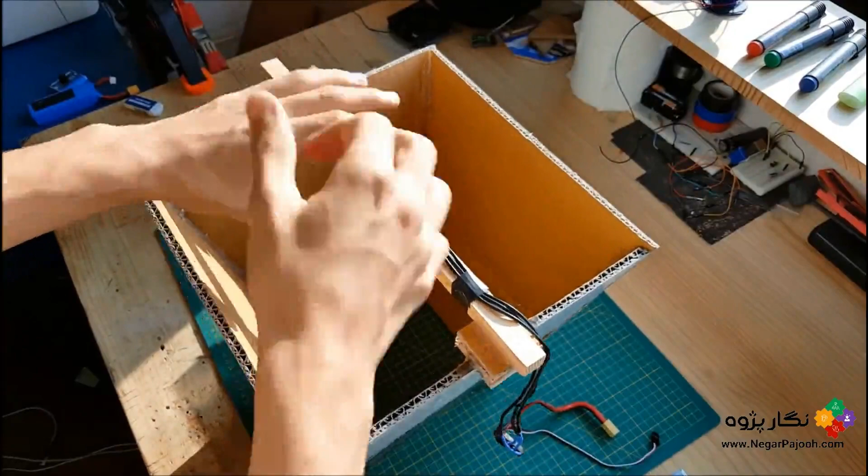That's why I wanted to see how the wind affected different objects and therefore study aerodynamics. That's why I made a wind tunnel. So now I'm done with the extractor. So there's a big motor here. It's going to push the air this way so it will suck the air that way.

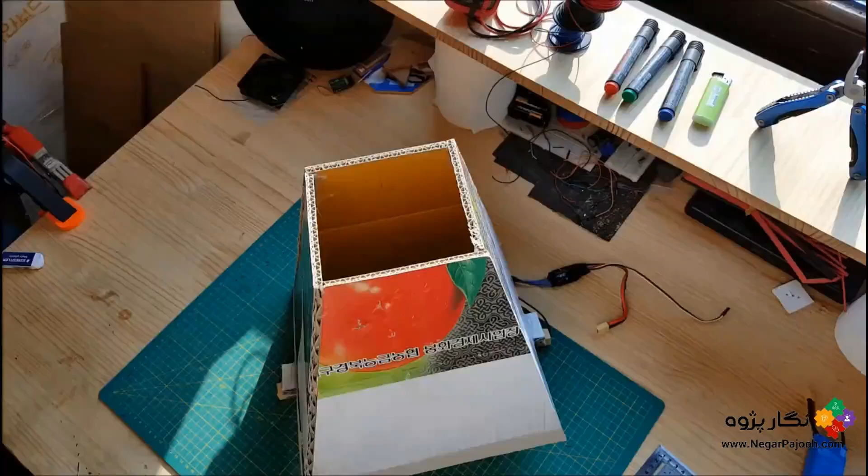So on top of this, I'm going to put the chamber. On the other side, where the air comes in, I'm thinking about putting some straws to have a laminar flow. You see, if the air is divided by all of these straws, everything will be parallel to itself and will create a laminar flow. So I've got here about 240 cut straws. I need 625.

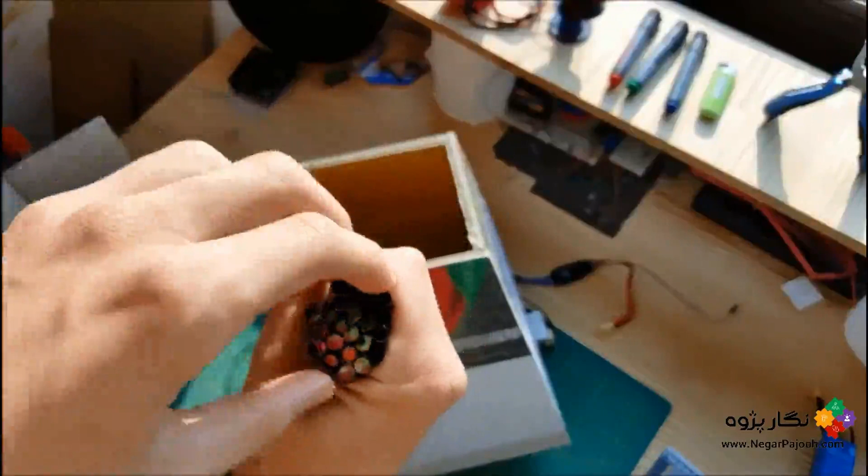You see, if the air is divided by all of these straws, everything will be parallel to itself and will create a laminar flow. So I've got here about 240 cut straws. I need 625.

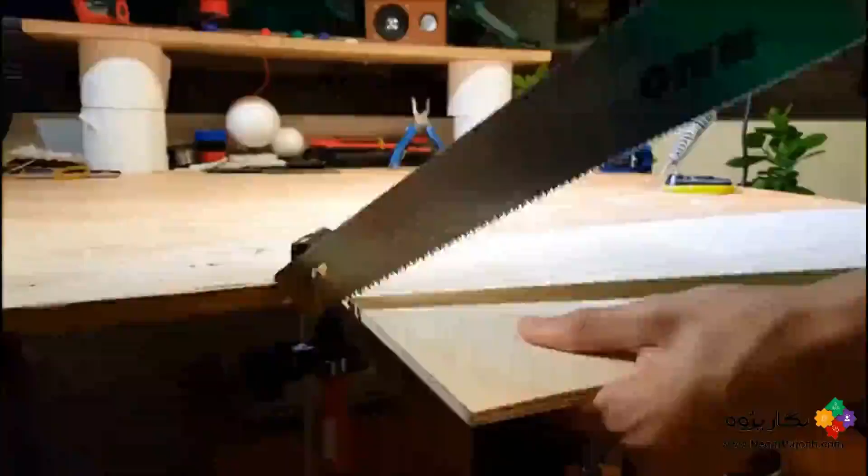So now we made this, so it'll be the test chamber. So the object will be able to move this way. The wind is going to push the object that way. We're going to put this sensor behind it and we're going to measure the force. So I've glued this piece, so this will always be there. And I'll stick the sensor.

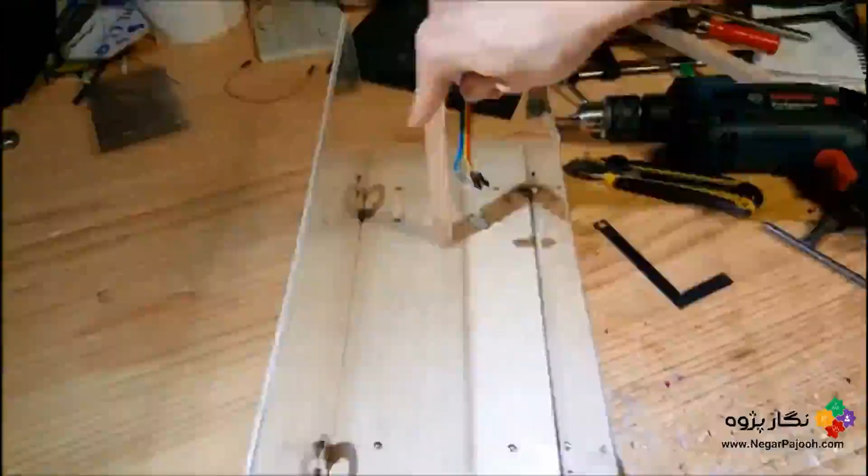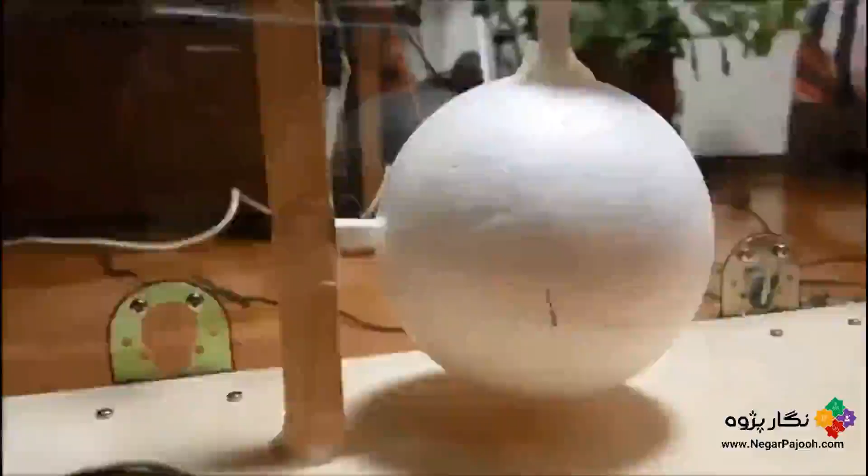I have to decide where, what height wires would come up this hole, and this was the first test, which wasn't very successful. In theory, it worked, but the sensor wasn't precise enough, and the hinge at the top wiggled too much. As a consequence, we decided to use a different sensor and make the chamber all over again.

Okay, so this is the test chamber. As you can see, we changed quite a lot of things, and it's made out of wood completely with this plexiglass cover so we can see inside. So it's held by these 4 brackets. The top here is just held by some rubber bands.

So for the measuring of the force, the air is coming this way, and the air is going to push the object, right? And we're going to measure that force. So this is called a load cell. So you can bend it. There's two resistances on either side.

The resistance changes in relation to the force you put on it, so the more you bend it. So this isn't enough. If you plug it in the Arduino, it won't work. So you have to use this, the HX711. And from the Arduino, I use Processing to get the data and show it on a graph, so we have a visual representation. So here we just use some threaded rod, which is easy.

We first made the whole test chamber out of plexiglass, but that was too flimsy and it wasn't good. If you want to make this, there are two sorts of wind tunnels: you either take wind tunnels where you can see the air passing through. You don't need a very powerful motor, but you do need smoke or something so you can see the wind passing. Here we wanted to see the effect of the wind on different objects.

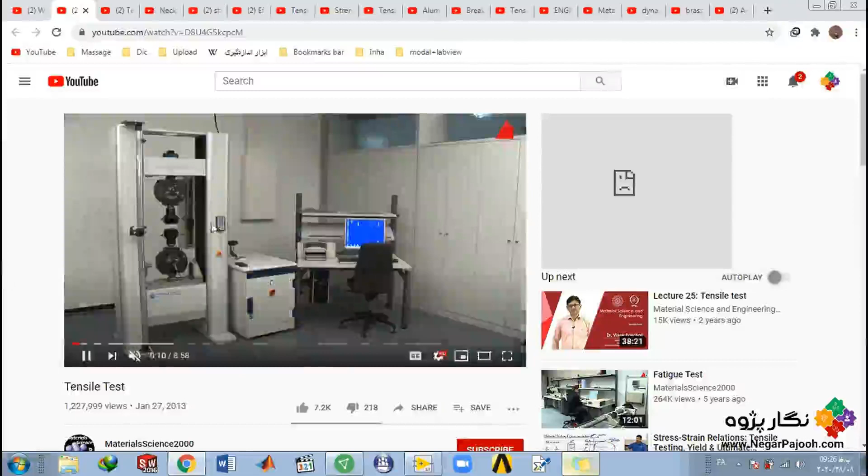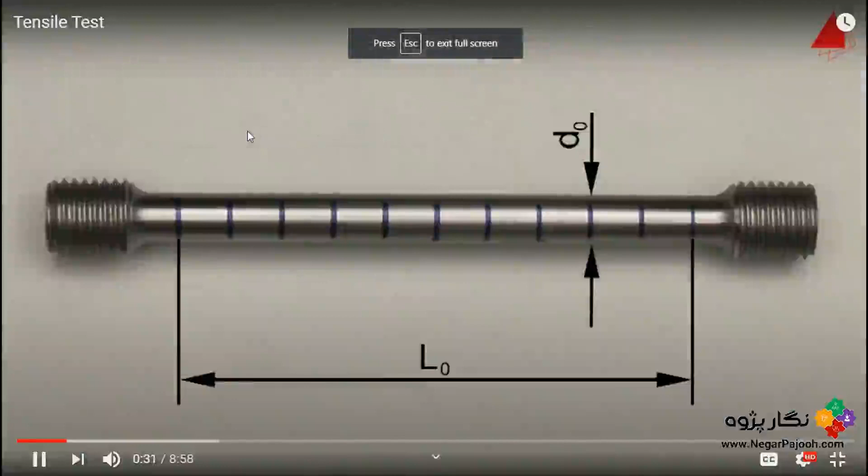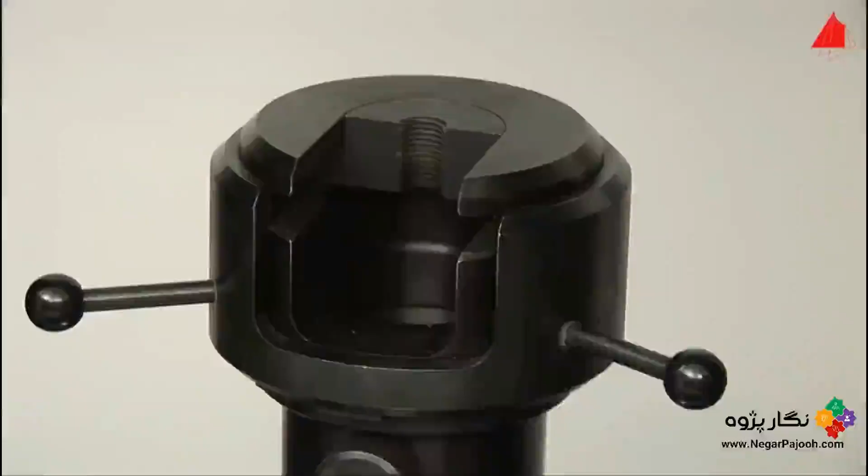In this test region, distance marks have been drawn at regular intervals. They help to visualize and measure the plastic behavior of the specimen. Using a hand control, the tester moves the upper crosshead into its correct starting position. Now he can place the threaded ends of the test piece in the lower and upper grips of the testing machine.

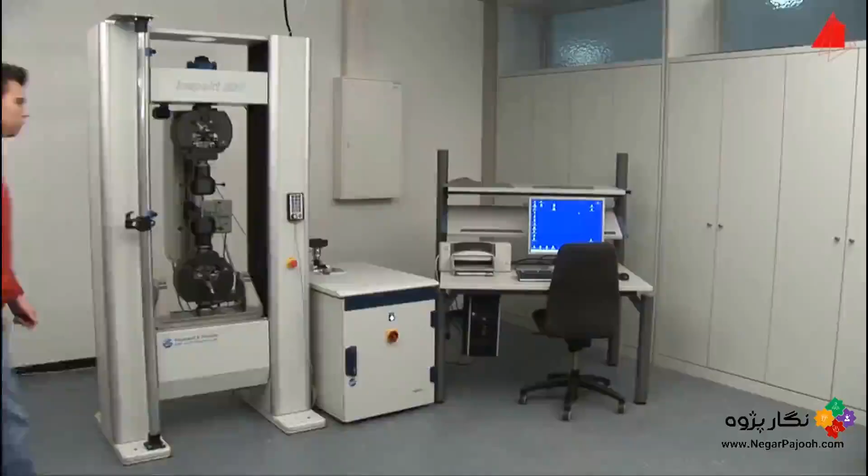In the next step, he swings the extensometer into its working position and checks that everything is correctly prepared. Then he selects all necessary testing parameters on the control computer. Ready. The test starts and the extensometer's sensor arms are carefully pressed onto the test piece. This way, the gauge length can be measured throughout the whole tensile test. The gauge length is displayed at the bottom right-hand corner of the screen. At the beginning, it amounts to 100 millimeters.

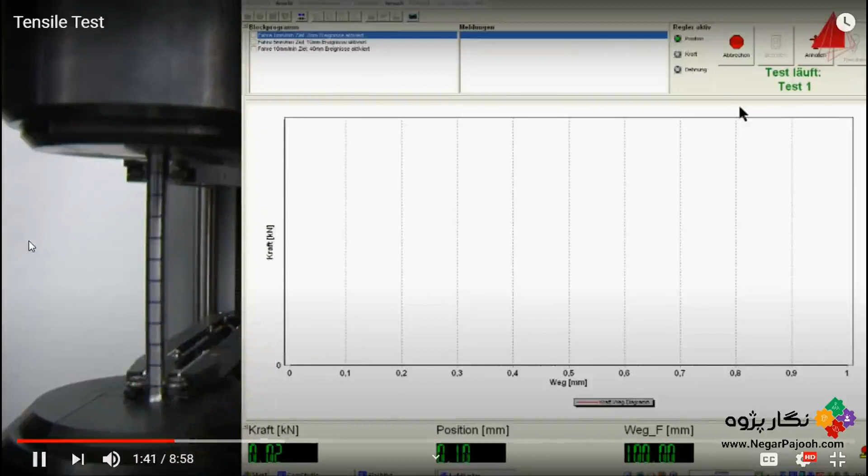During the tensile test, the test piece is slowly and constantly elongated with a standardized speed. The force that the test piece opposes to the imposed elongation is recorded and can be seen at the bottom left-hand corner of the computer display. The material behavior can best be observed in a force elongation diagram. The force F is being plotted upwards on the vertical axis, the elongation delta L towards the right on the horizontal axis. At first, the force rises rapidly.

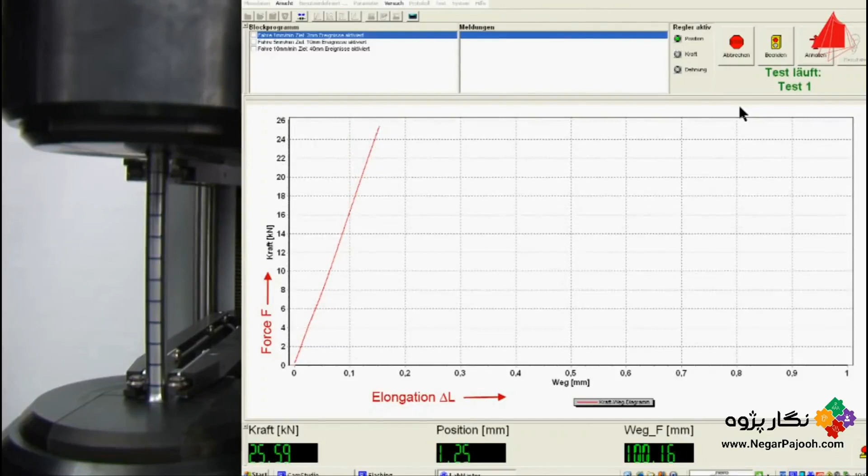Force and elongation are proportional and form a steep, straight line in the diagram. In this area, the material behaves elastically. If the test piece were to be unloaded from this area, it would spring back completely to its original length. In materials with yield point phenomenon, the end of the elastic area can be seen clearly. The plastic deformation...

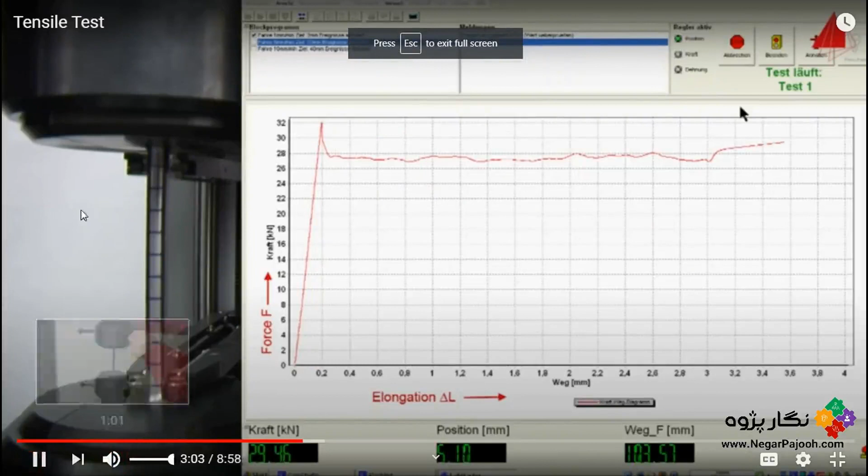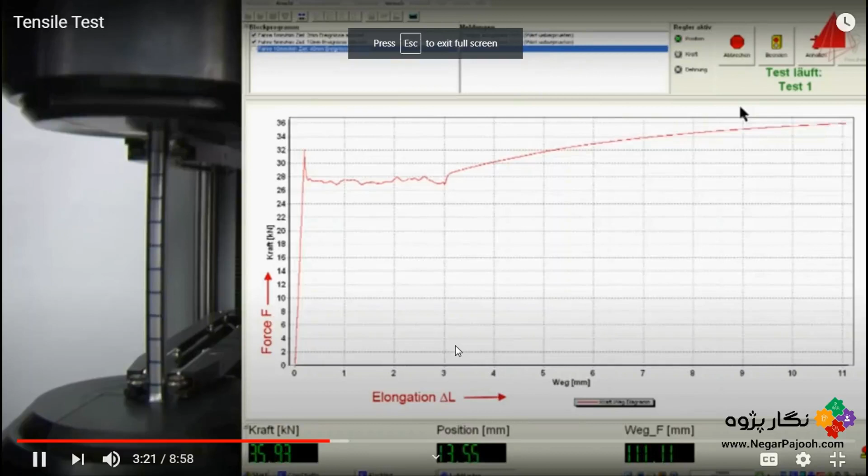Again, the material opposes an increasing force against the imposed elongation. It strain hardens. Up to the point of maximum force, the test piece is strained uniformly along its length. This means that the test piece gets longer and thinner but keeps a cylindrical shape.

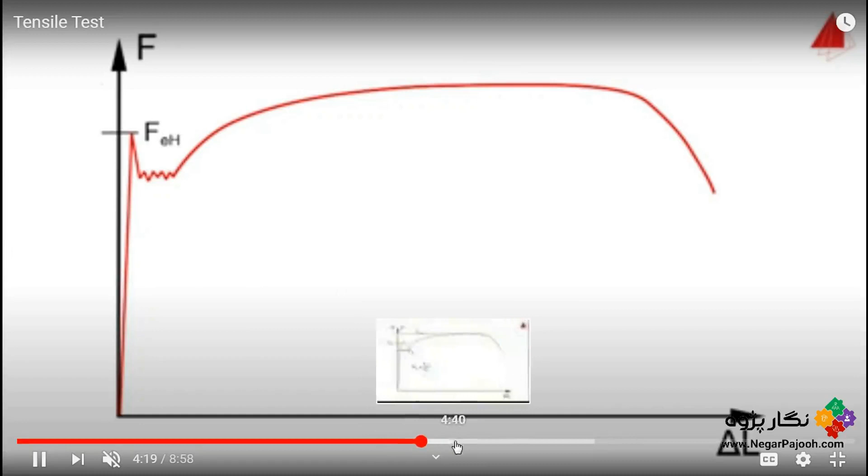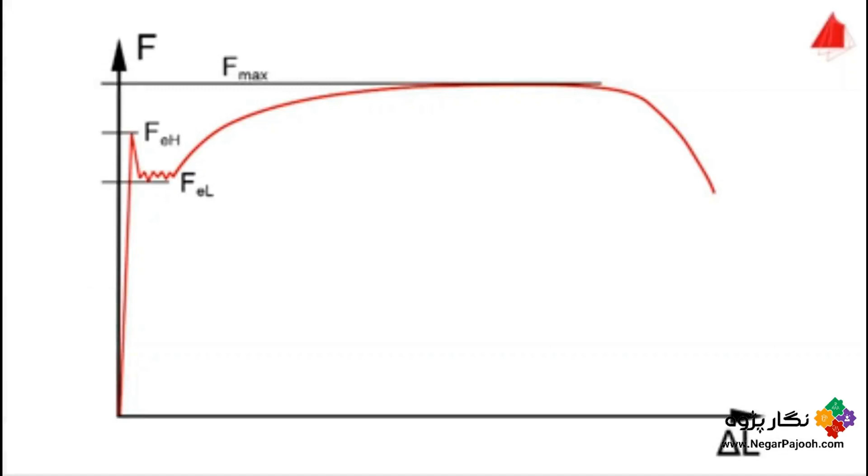As the maximum force. Using these forces, the strength properties of materials can be calculated. The upper yield strength ReH is calculated by dividing the force FeH by the original cross-sectional area S0. The lower yield strength ReL is defined in a similar way. The maximum force divided by the original cross-sectional area is called tensile strength Rm.

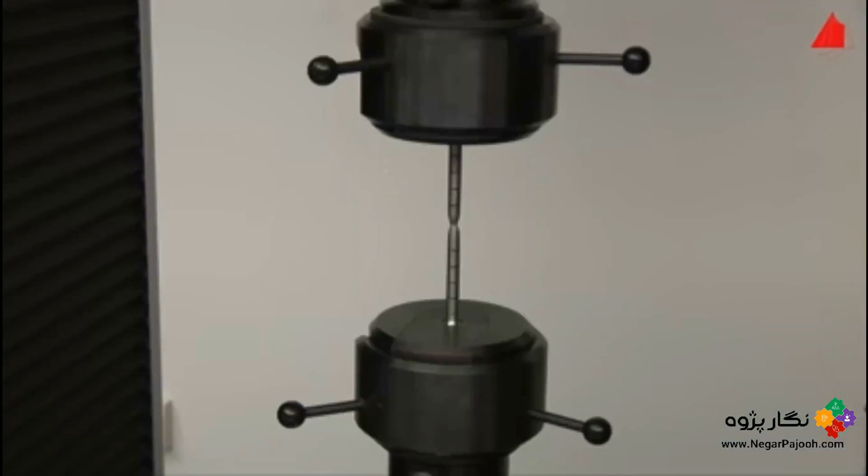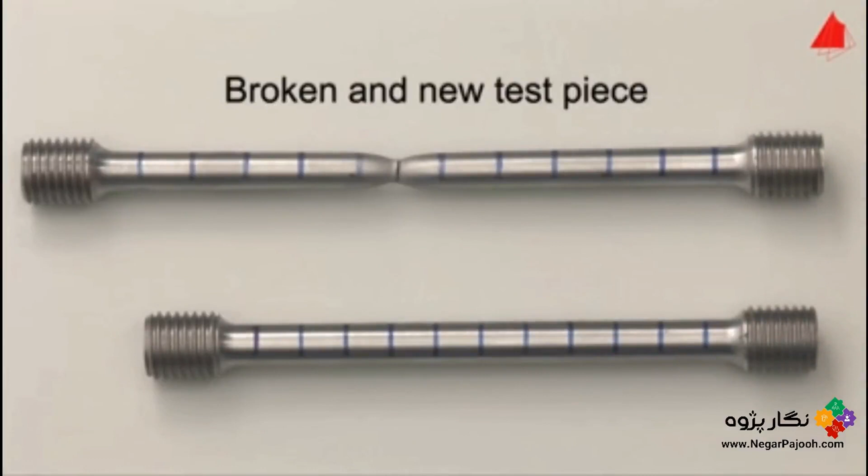In the last step, the tester swings the extensometer back into its resting position and removes the broken test piece. On the work table, he puts the fragments back together again. With the help of the distance marks, the percentage elongation after fracture can be determined. This is the permanent strain after fracture and amounts to about 30% in this example. Please note that the percentage elongation after fracture depends on the length to diameter ratio.

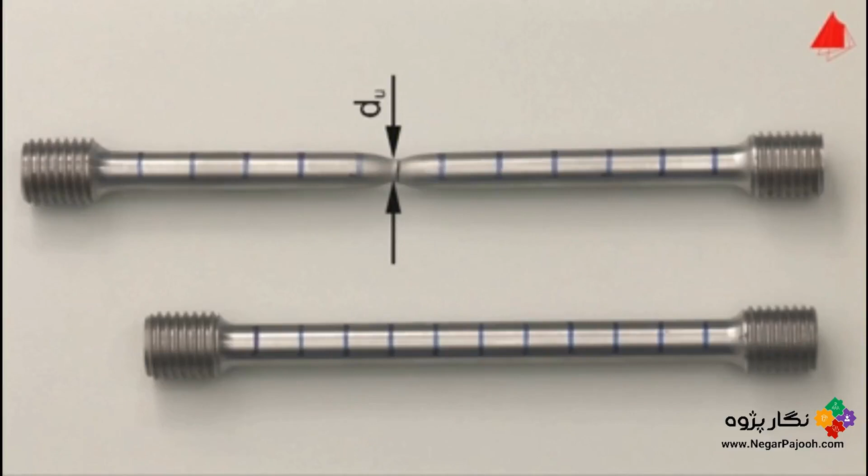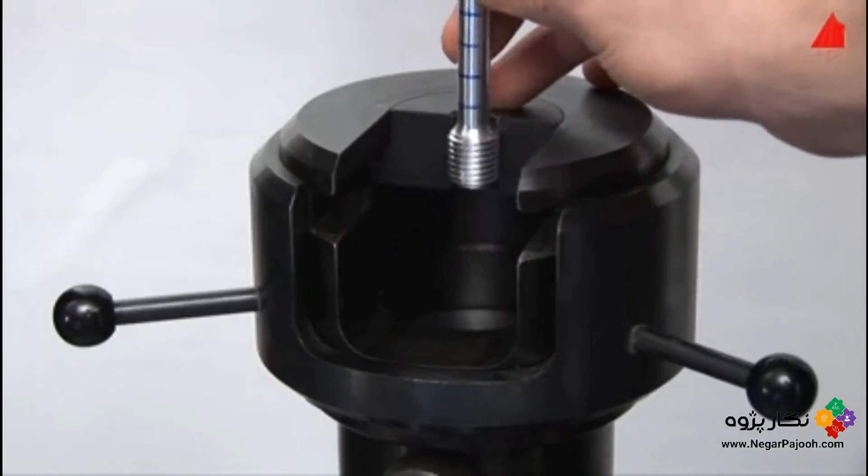By measuring the smallest diameter at the point of fracture, the percentage reduction of area can be calculated. It describes the reduction of cross-sectional area at the point of fracture in relation to the original cross-sectional area. In the second tensile test, a material without yield point phenomenon is to be tested. In this case, it is a precipitation-strengthened aluminium alloy. The test piece has exactly the same shape and dimensions as the specimen in the first test. It is cylindrical, with an original diameter of 10 millimeters and an original gauge.

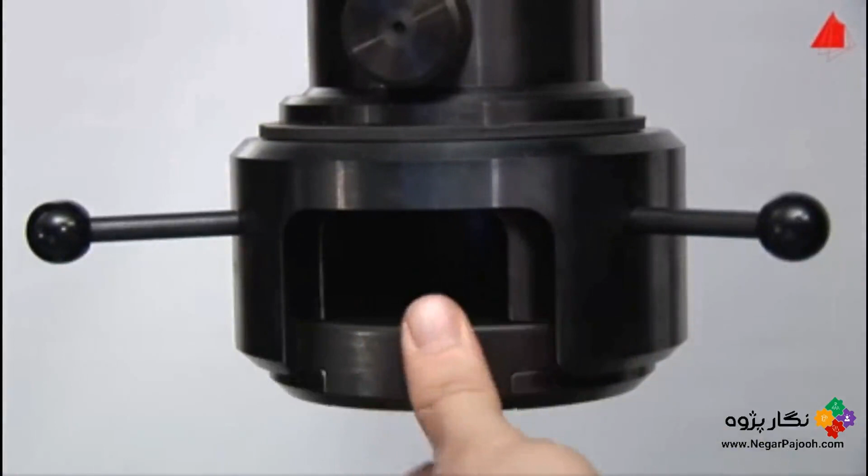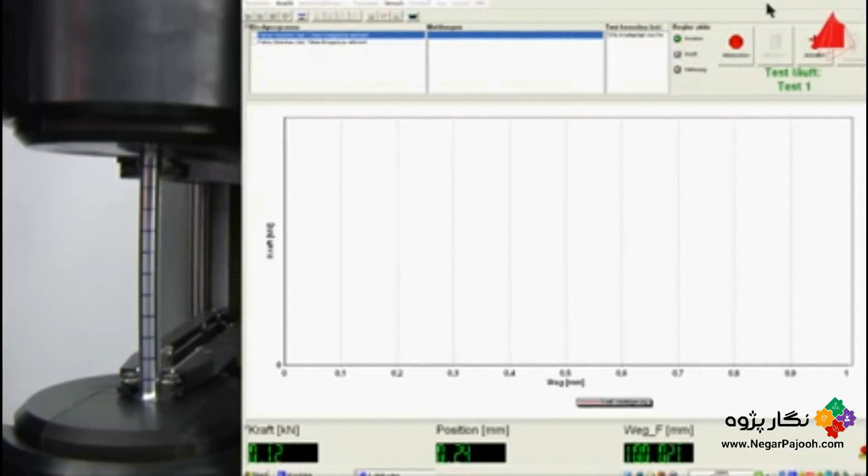Of 100 millimeters. After fitting the test piece into the testing machine and panning the extensometer into its working position, the test can start. The initial linear curve in the force elongation diagram again shows the elastic.

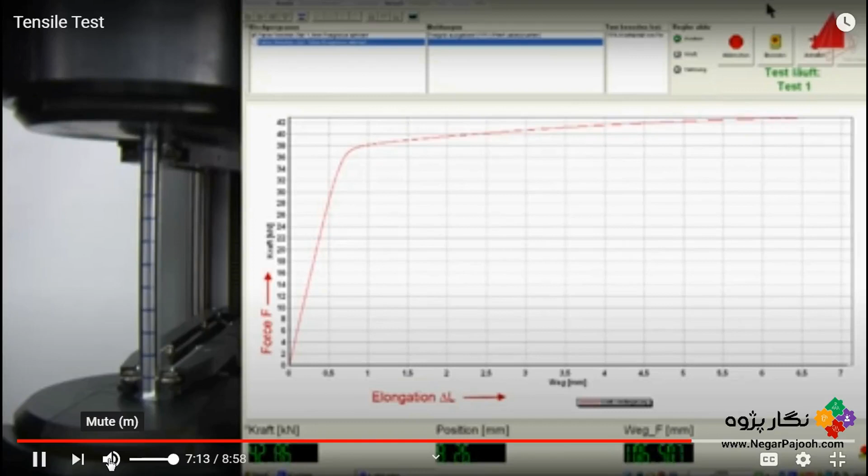But this time, the end of the elastic area is not revealed by a sudden drop of force or any distinct change. There is a smooth and gradual transition from linear elastic behavior to plastic deformation. In the further course of the tensile test, the force increases and the test piece again is strained uniformly along its length. At the point of maximum force, a neck develops, and all subsequent plastic deformation is confined to this neck until fracture finally occurs there.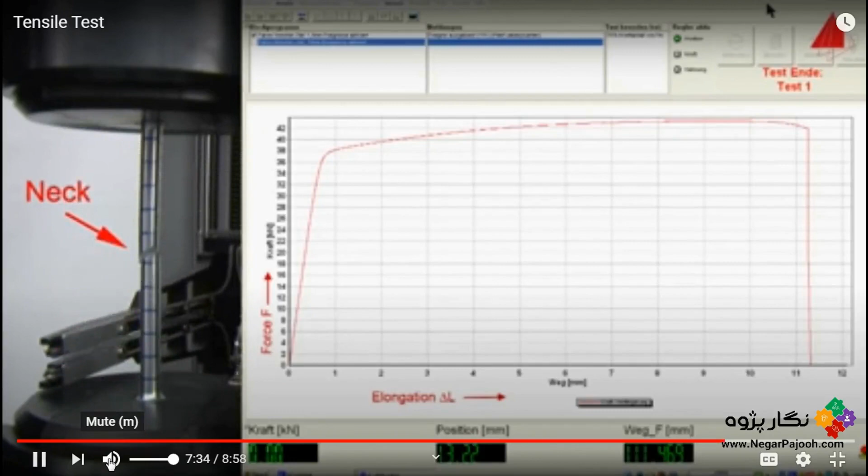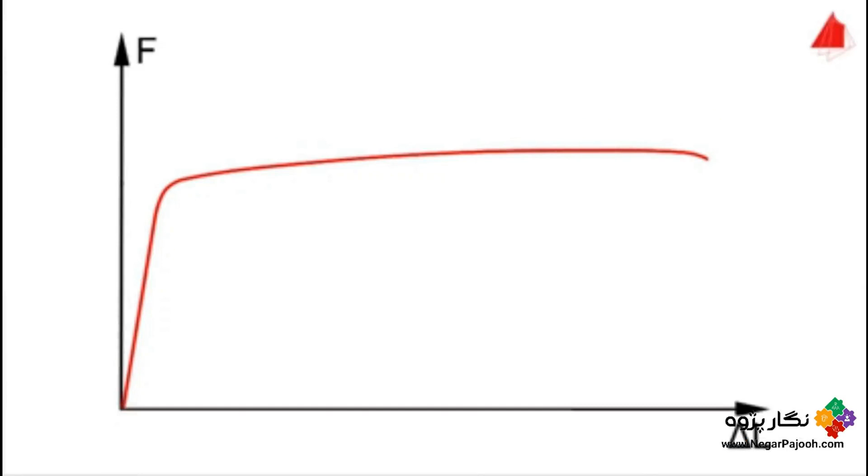As a common substitute for the yield strength, the 0.2% proof strength is used. It is the stress that causes 0.2% of plastic deformation in the material. And this is the way to calculate it. First of all, the elongation that corresponds to 0.2% of strain has to be computed. For an initial gauge length of 100 millimeters, the result is 0.2 millimeters.

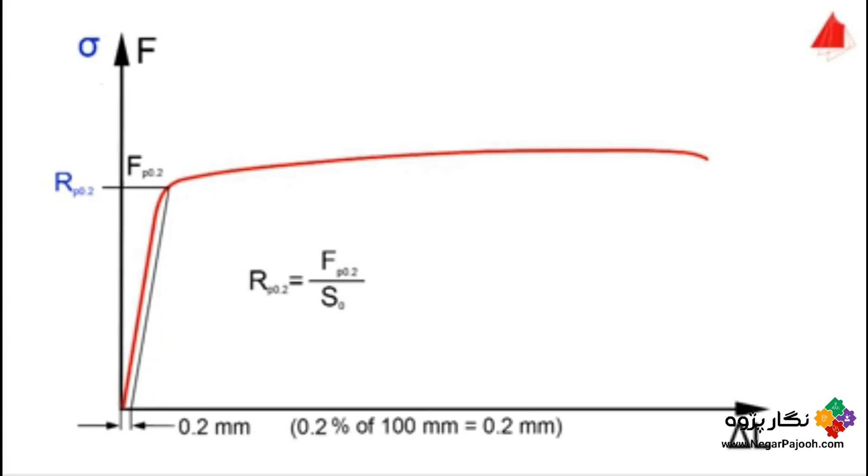In the force elongation diagram, a straight line parallel to the elastic line is drawn through the offset point of 0.2 millimeters of elongation. The force at the intersection point of the offset line with the force elongation diagram is designated as Fp0.2. This is the force that causes a plastic strain of 0.2%. The 0.2% proof strength, Rp0.2, is equal to Fp0.2 divided by the original cross-sectional area S0. Tensile strength, percentage elongation after fracture, and percentage reduction of area.

And I'm receiving a force of the air that should have been the force on the object, and it's not on the object because I'm blocking the flow. And this is the exact same thing that happens here. I'm just blocking most of the flow, and it just doesn't work. So leaving it open is fine, really. I did try to use this Flexiforce sort of sensor, and basically you put a force here, the resistance changes, and we made a really complicated setup where we had a hinge that moved where the object was, and the object could push on the Flexiforce.

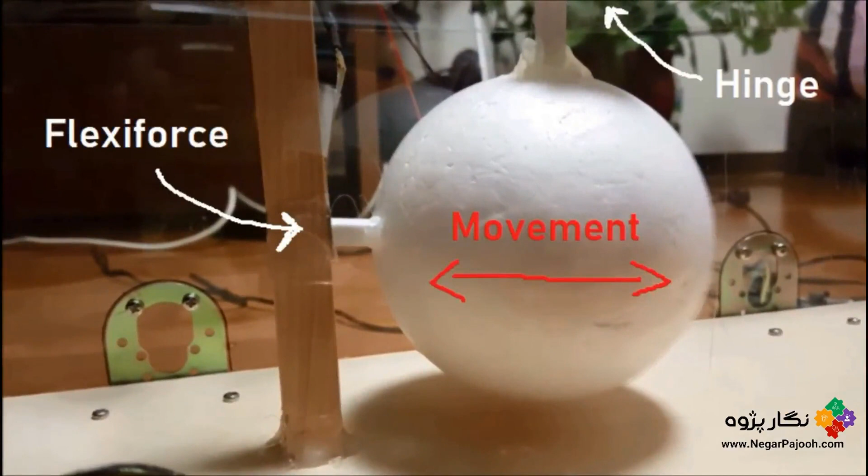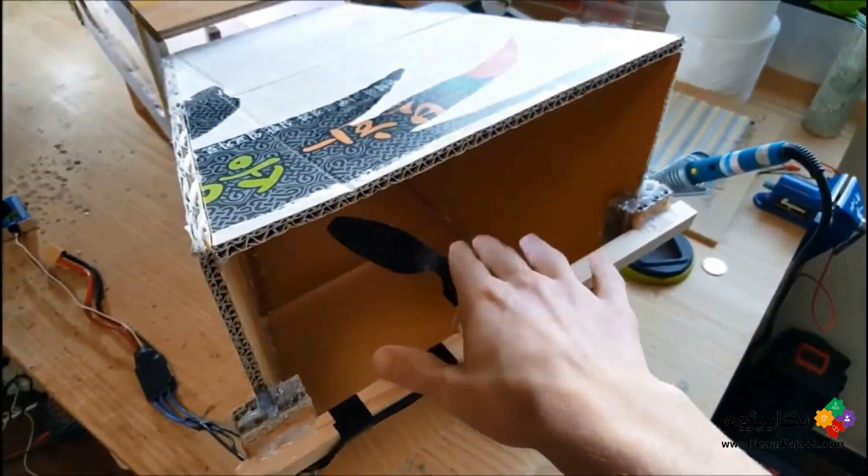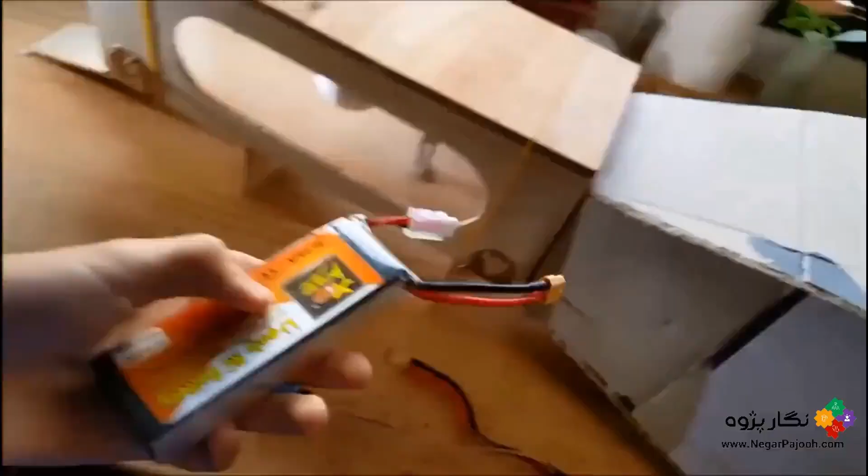There's a security concern that you should address, which is to obviously never get close to the motor. We did want to put a sort of mesh kind of thing on this to prevent any accidents, but we didn't see how we could put it on, and we actually needed to access this. But we always unplugged the battery, of course. So whenever the battery is not plugged in, the motor cannot turn.

And that's it. So this was a great project. I learned a lot about shapes and stuff.

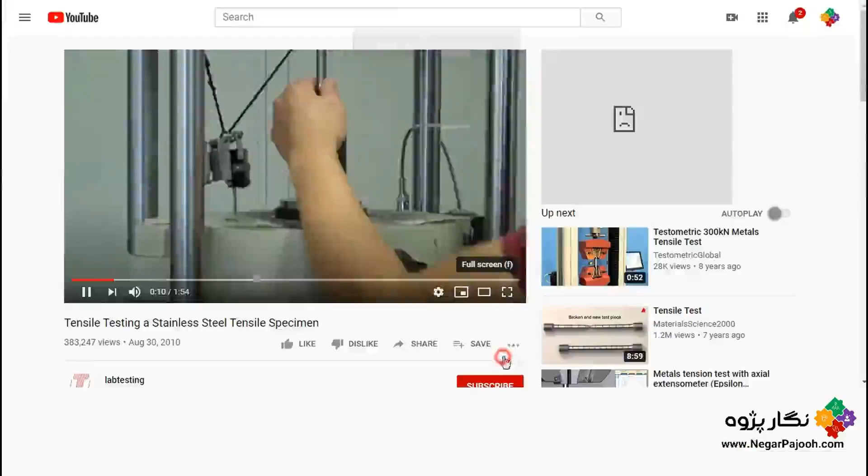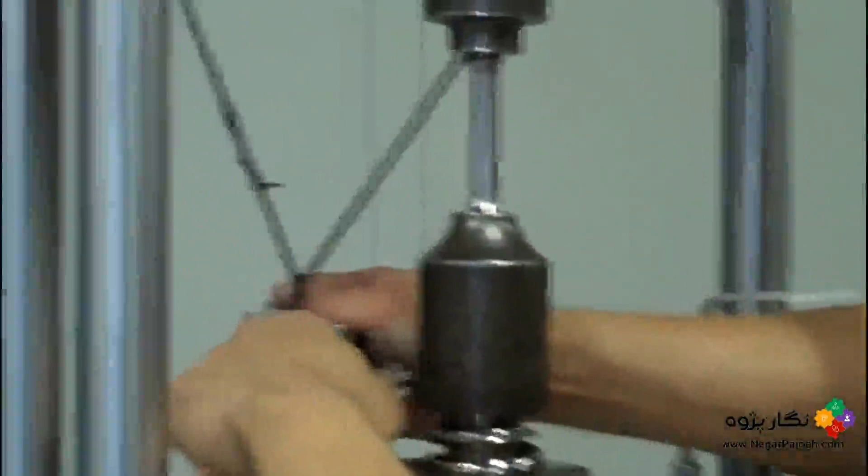Gauge tensile specimen between crossheads. Apply extensometer to determine yield strength of material.

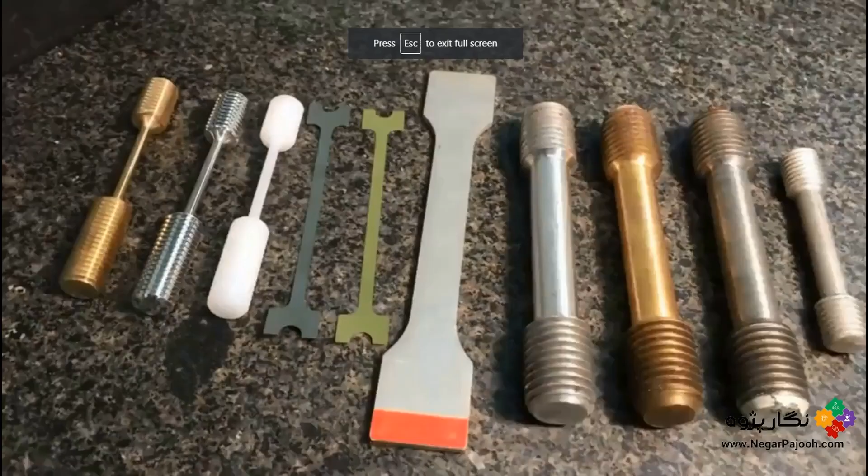Way to see how strong a material is. Let's take a look at what a tensile test will tell us. A tensile test is a way to see how strong a material is by pulling on it. To perform a tensile test, we first need a sample of the material we're interested in testing. Tester, it turns a gear that slowly moves the grips apart. It's hard to see, so I'll set